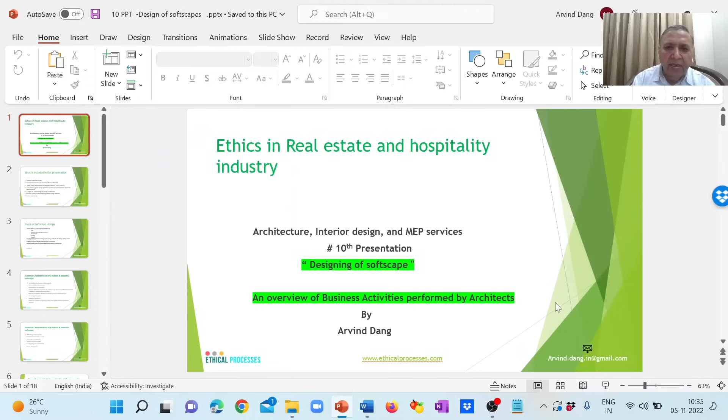Today is my 10th presentation on the subject of ethics in real estate and hospitality industry, and today's topic is designing of softscape or landscape.

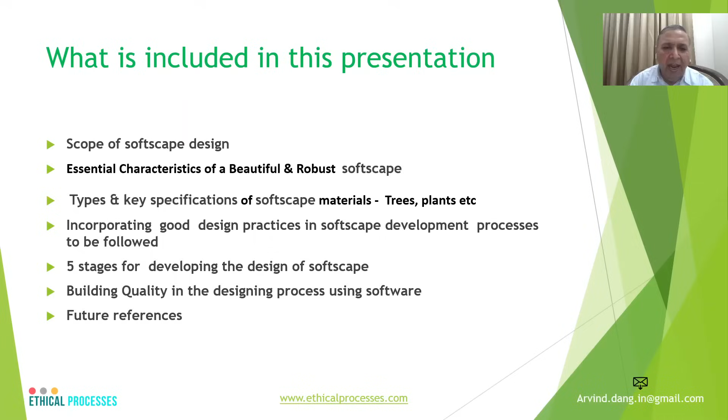What I intend to include in today's presentation is the scope of softscape design, the essential characteristics of a beautiful and robust softscape or landscape, the types and key specifications of softscape materials used such as trees and plants, how to incorporate good design practices in the softscape development process, the stages of developing the softscape—primarily 5 stages which I am proposing—and how to build quality in the designing process using software.

Now, scope of the softscape design includes finalizing the specification for trees and plants, for both exterior and interior areas, ground covers, grassing, planters, etc. Number 2 is providing technical guidelines for planting, layout and spacing, quantity takeoff, watering, fungus control and maintenance of this landscape.

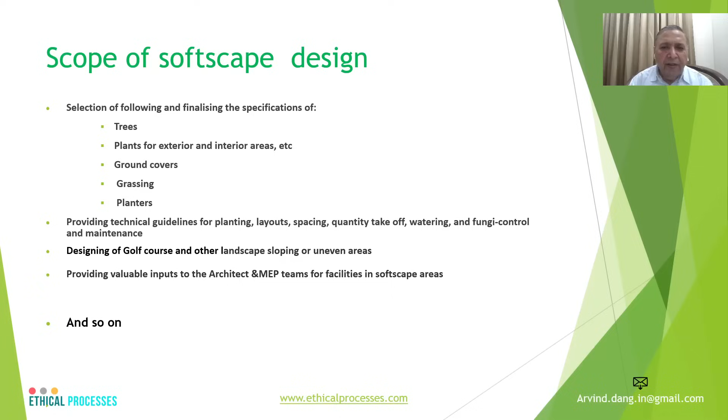Designing of the golf course and other landscape sloping or uneven areas, and providing valuable inputs to the architects and MEP teams for providing facilities in the softscape areas.

What are the essential characteristics of a robust and beautiful softscape? Architecture and horticulture related aspects include having scenic beauty of the landscape, contributing to air purification, selection of plants, trees and shrubs based on the specifications given, and installation as per planned specifications, aesthetically appealing in various spaces.

Designing for efficient utilization of the softscape space in landscape areas, introducing roof gardens as a new concept, bringing in green walls, and of course golf course contours and grassing quality meeting international and national standards.

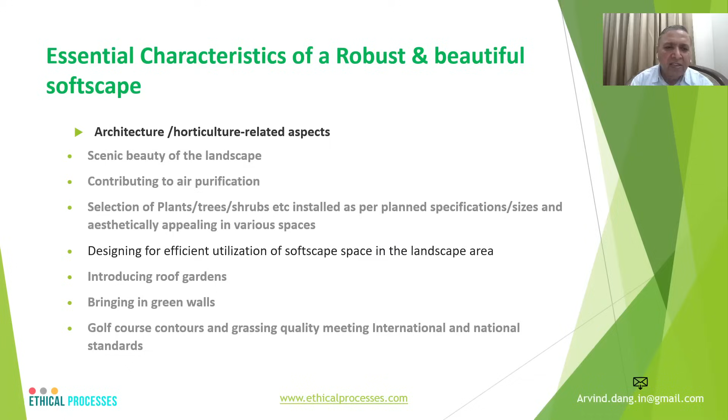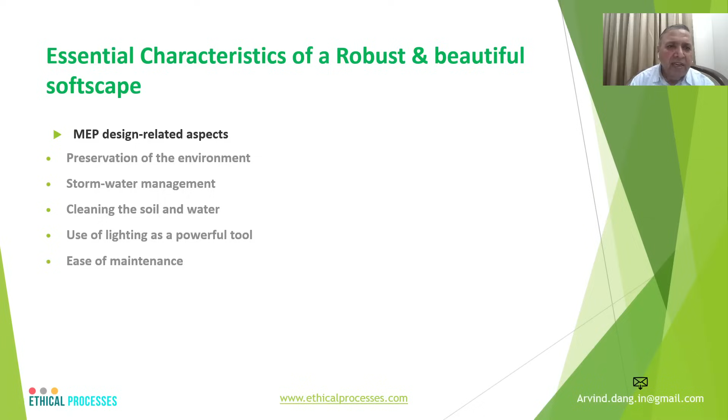MEP design related aspects in landscape design include how to preserve the environment, stormwater management, cleaning of soil and water, using lights as a powerful tool, and ease of maintenance of this landscape.

Different types of materials used in the landscape include trees, ground covers and grassing, as already stated. In this slide, I am going to share the different types of each of these landscape materials and the broad specifications which should be provided by the softscape designer.

In the case of trees, there are different kinds. The most prominent ones used for landscape are coconut palm, oak, pine and redwood, etc. The softscape consultant or landscape consultant is required to provide specifications in terms of height, stem, trunk diameter, branches, spread, canopy, uniformity and fullness, leaves, flowers, fruits, etc., and the roots.

These are required to be projected on a scale.

Now for the ground covers, these are required for areas like garden, landscape, kitchen, inside rooms, work areas, etc. There are different kinds of ground covers like rubber, wandering Jews, betel leaf, peace lily, fittonia, spotted plant, dummies, woolly thyme, Irish moss, blue star creeper, Roman chamomile, ladies mantle, etc.

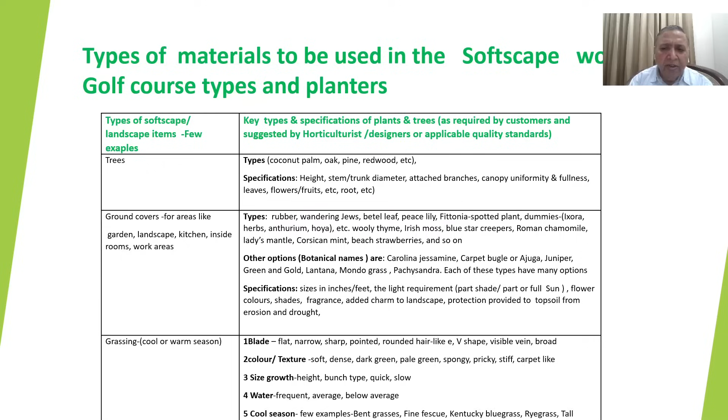A few examples are bent grass, fine fescue and Kentucky bluegrass, etc. Different sizes are required to be there for these.

Now, then for the golf course, the golf architect has to decide whether it is a 9-hole or 18-hole course, and accordingly plan the specifications and sizes for the different parts of the golf course.

A golf course can be prescribed to have 6-7 major components as far as design is concerned. One is the tee box, the teeing ground where the hole begins; the fairway, 30 to 50 meters from the hole with tight trimmed grass; the green, where each hole is located with cut short grass; and the rough, an area surrounding the fairway with longer grass. For turf grass, durability and drought tolerance is required to be prescribed.

The turf choices are Bermuda, bent grass, fescue, or zoysia - different kinds of grasses available which are normally imported by various countries. Then hazards like ponds, lakes, creeks, etc. are all required to be part of the golf course design. I remember going through that - it's a very complex process.

Planters can be either outdoor or indoor. These can be of different types like ceramic, plastic, wooden, concrete, nursery, garden planters, urn, grow bags, window boxes, wall planters, vertical planting towers, hanging baskets, railing planters, and so on and so forth.

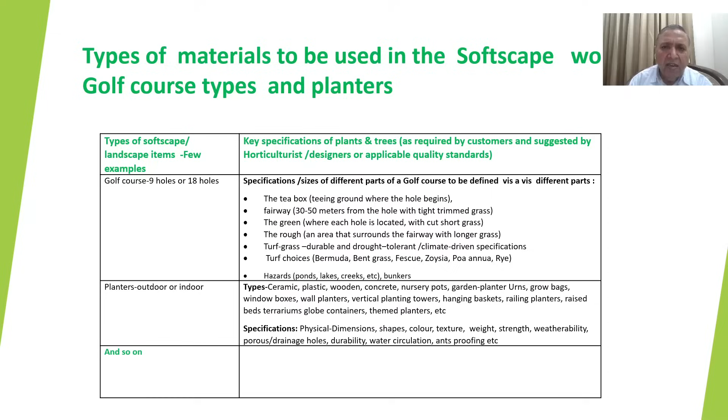For each of these different types, the Softscape consultant has to suggest the physical dimension, the shapes, the color, the texture, the weight, the strength, the weatherability, the durability, water circulation, and ant proofing, etc. These are all the requirements needed in a good Softscape comprehensive design.

Now, how to incorporate good design practice in the planting and installation of Softscape materials? Mere procurement of this Softscape material is not good enough. These are required to be installed professionally and maintained professionally.

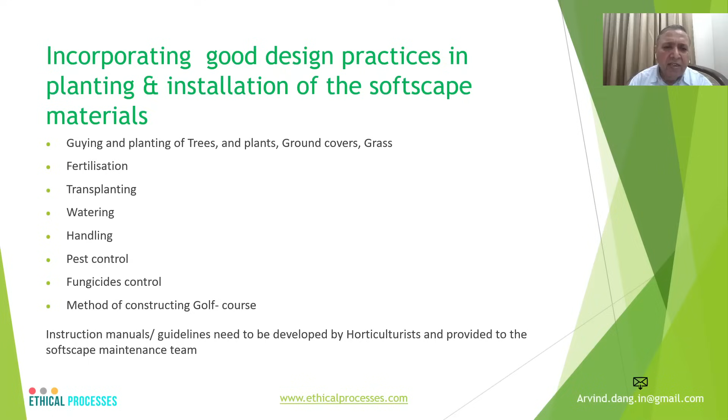Good designers are expected to provide various guidelines for guying and planting of the trees, plants, ground covers and grass, fertilization, transplanting, watering, handling, pest control, fungicide control, and method of constructing the golf course, which is of course highly technical as already mentioned.

Now, how to build quality in the designing process using design software? Horticulturists propose high quality choices with comprehensive specification for all these Softscape materials which I already talked about. Now, the watering system has to be in coordination with the MEP team.

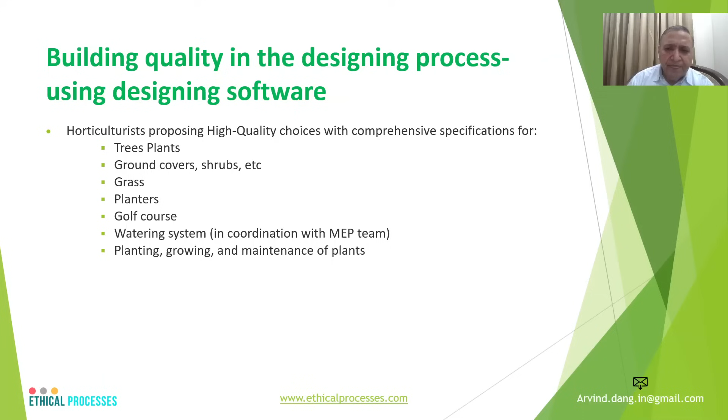Next, regarding software availability - irrespective of the choice of software, it must provide inputs to designers for designing swimming pools, ponds and water bodies, patios, fencing, driveways, lawns, landscape furniture, landscape lighting, and the watering system design. In each of these areas, for example lighting, swimming pool, or watering system, there are very complex design computations required, and this software must provide valuable inputs for these.

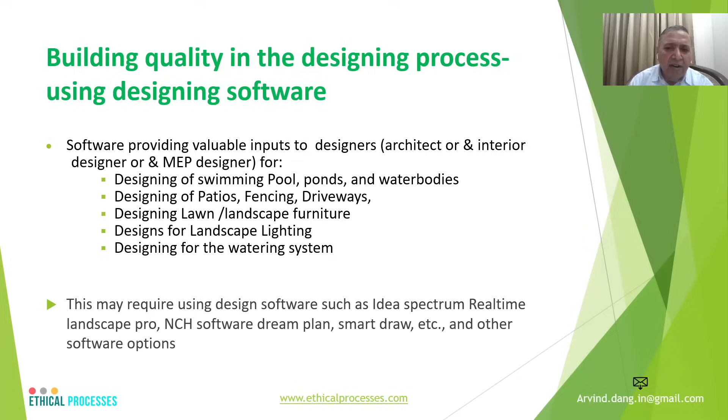There are softwares like Idea Spectrum, Real Time Landscape Pro, NCH Software, Dream Plan, Smart Draw, etc., which are various options available for the designer to choose from.

Now there are 5 stages of the design process which I am suggesting. Irrespective of the stages, whether it is 5 or 6 or 4, the design must lead to building a softscape design which is very comprehensive and accurate - accurate in terms of the bill of quantities and the spacing between different plants.

It must incorporate the customer requirement and meet national and international quality standards for material specification and guying and planting processes. It must integrate any statutory and safety requirements, if there are any, in the designing and drawing, particularly in terms of, for example, the golf course, etc.

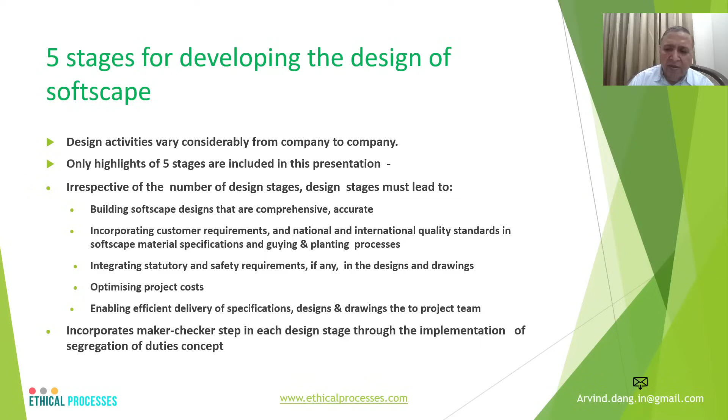It must optimize the project cost. It must enable efficient delivery of the specifications, design and drawings to the project team. And of course, it must provide for the maker and checker concept in the case of various stages of the design, from stage 1 to 5.

In the first stage itself - I'm not going to share in any of these stages what are the exact steps or process required within each, but I'm going to share what are the activities that can adversely impact the business, either financially or from an ethical perspective.

Not incorporating the inputs related to the trees, plants, or ground cover, etc., from the property owners, the sales team, the design teams, or the customer team in the case of the hospitality industry, can adversely impact the business. Using unlicensed software can also lead to serious problems in the appropriate designing.

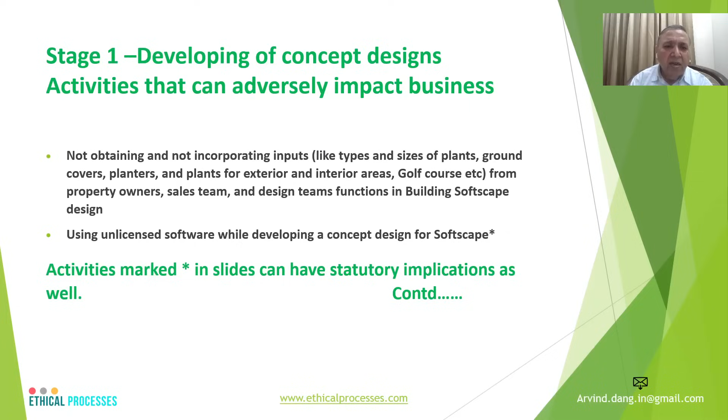Some of these observations are marked with an asterisk mark. These can at times have statutory implications as well.

Continuing in design stage 1, in case the vetting of the concept design is not done comprehensively, or the softscape consultant or horticulturist is in collusion with the in-house or outsourced horticulture consultant, and they skip various important aspects of the designing.

This can cause very serious impact on the quality of the softscape design and its ambience. For example, compromises can be made in terms of the tolerance of the softscape material, or workmanship, or bill of quantities of softscape, or compromising on the quality standards, size, specifications, and safety requirements.

Now, in case the designers collude with the potential vendors, it can lead to a lot of problems in the design.

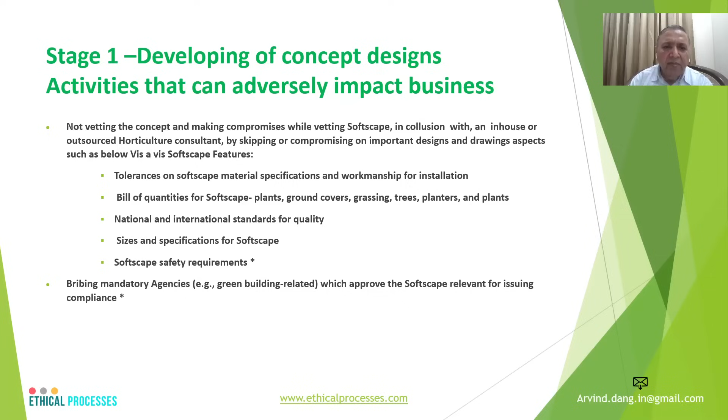Bribing the mandatory agencies, particularly when the entire project is a green building project, there are requirements with respect to softscapes in the case of green building certification. So this is not a good practice.

Developing of the detailed design. Here, the compromises can be that the detailed design which is being drawn in terms of detailed specifications for these trees, plants, grasses, planters, etc., is not aligned to the concept design which was developed in the previous stage.

The softscape layout, spacing, quantities, etc., are either not specified, or not given comprehensively, or not presented pictorially in the design. The methods of guying, watering, handling, pest control, transplanting equipment, fungicide control, and the method for developing the golf course are not in sufficient detail, which can lead to not complying with the proper design process.

Assigning the same landscape designer to develop the specification and drawings in this stage, who also developed the concept design, can also lead to compromises in the design quality.

And compromising on the specification of the development of material samples - a good horticulturist or softscape designer would obviously get samples before ordering in bulk, because at times these are very expensive trees and plants. So making any compromise at that stage can lead to a lot of problems for the business.

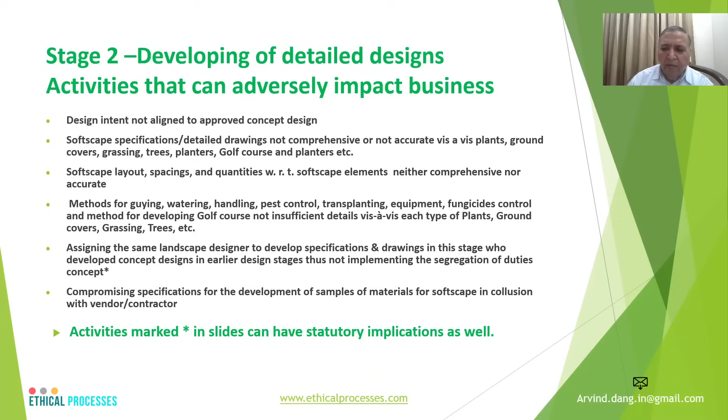Developing of the tenders. Now, activities that can adversely impact this are that the designs and drawings which are drawn are not comprehensive, or they are prepared keeping specific vendors in mind for various trees and plants, thus colluding with them and obtaining kickbacks from such vendors and compromising on the specifications of these softscape materials.

Landscape designers or architects recommending only a single source for many of the plants, which are otherwise pretty expensive - it could be the trees, the plants, the grass, turf, etc. So colluding with the single source and thus diluting the negotiating capability of the purchase team in return for kickbacks from single vendors.

Then tender drawings not being comprehensive, and not specifying the quality standards and inspection requirements with respect to each of the softscape materials comprehensively.

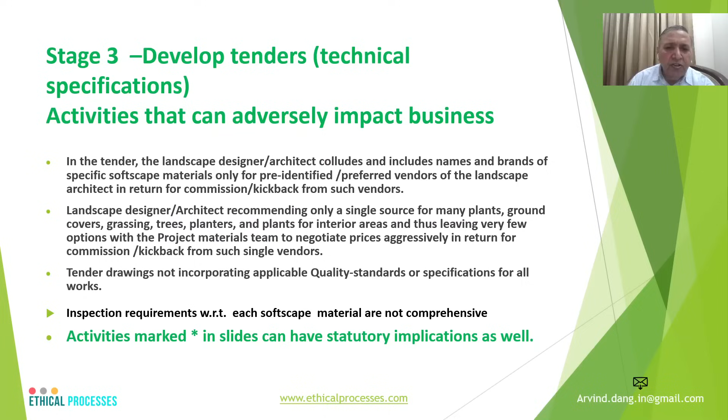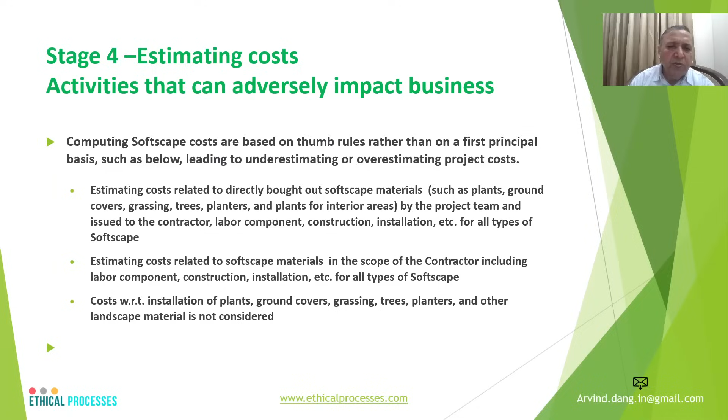Cost with respect to installation and trees, plants, ground covers also need to be specified, particularly including the development of the golf course.

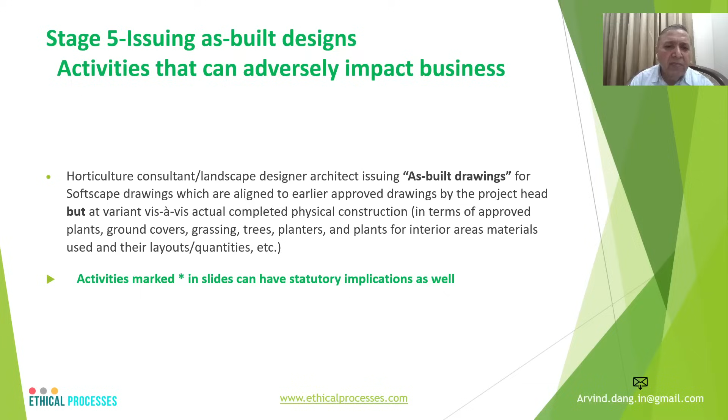Issuing of the as-built drawings. Now, once the design has been developed and the planting and installation of these trees, plants, etc., has been done, the designer needs to develop the as-built drawing which is identical to the actual work done, rather than based on the drawings which were initially developed in design stage 3. So these must align, otherwise this can have statutory implications, particularly in the case of green buildings where you need green building certification.

Now, there are 21 activities overall that can adversely impact the business while designing the softscape, and more details of these can be found in my book called Ethics in the Real Estate and Hospitality Industry, Volume 1. There are also blogs available on the website with details given in this slide.